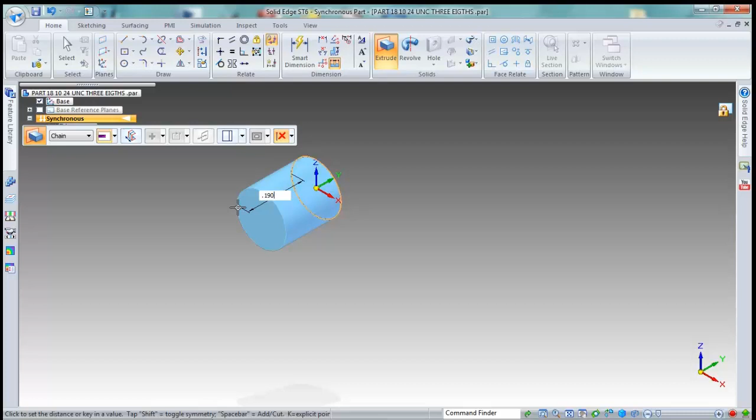We'll get the head taken care of first. We're going to extrude this in this direction, a distance of 3/4 of D. H equals D. So we're going to say 0.190 times 0.75. 0.143.

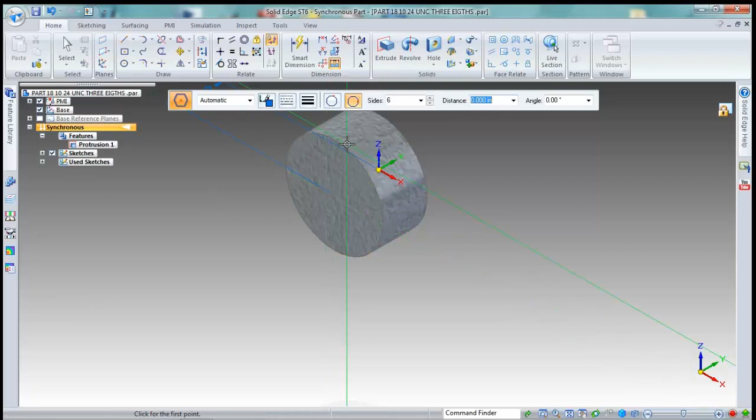This is a hex head piece, so we're going to draw a polygon by center, 6-sided, and from the flats it has a J dimension of 5/32. So we'll start in this plane, hit the edge, find the center point. Now, what is 5/32 divided by 2? Not sure, so we'll do 5/32... .078, and we'll just pop that right in there.

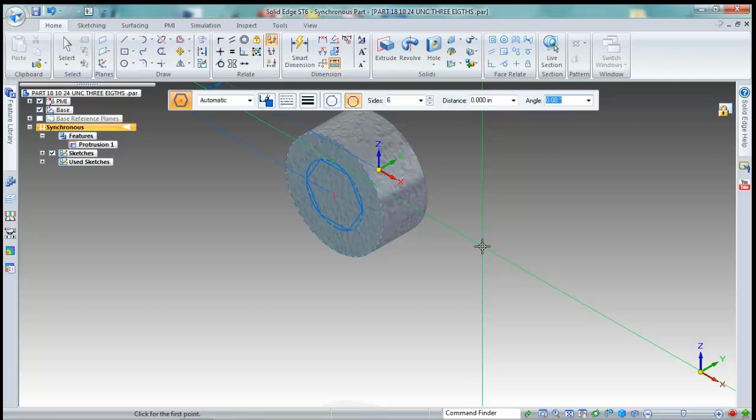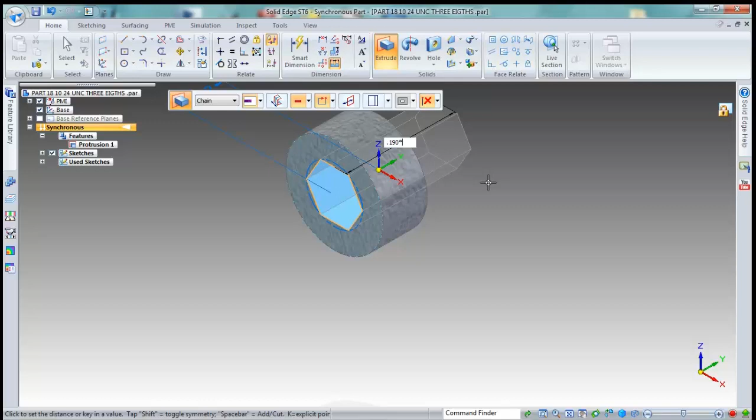Now the depth of this is 3/4 of dimension D, so it's the same as the H dimension, or 0.190. So I'm going to take my extrude tool again. I'm going to make sure it says remove. I'm going to grab this edge, hit enter. We're going to pull that in, and it's going to be 0.190 times 0.75. So there we have our head cap.

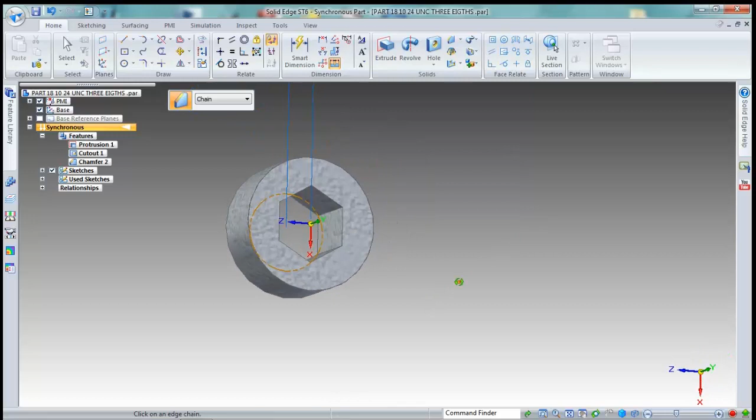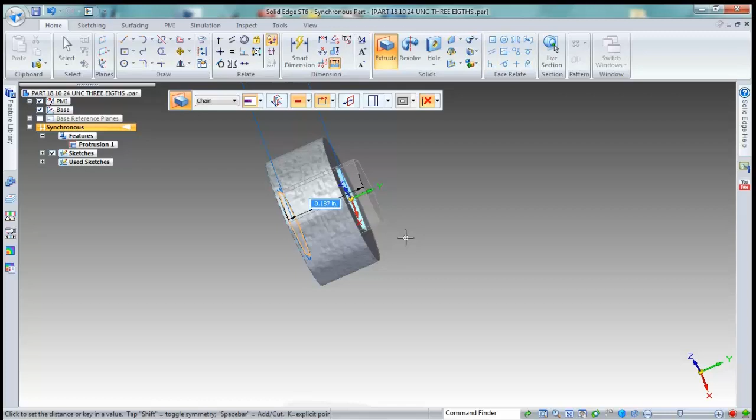Has a little bit of a chamfer on this edge, probably 0.015. Again, these are coming out of the box, so I'm not going to get too fancy with them. Ooh, why'd that go all the way through? That was not good. Did not want that to happen. All right. This should be 0.190, so I'm not sure why that got messed up, but we will see if we can fix that.

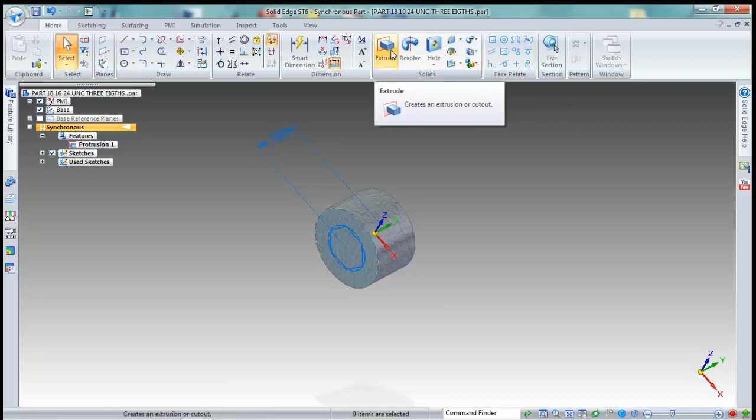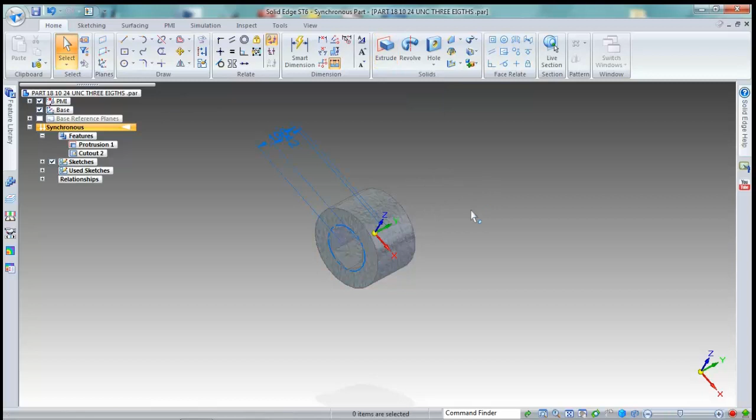Drop some live rules. There we go. Try it again. Extrude. I think I extruded that 3/4 instead of the socket head. So it's 0.190 times 0.75. Oh, come on. Oh. Gotta have remove. 0.190 times 0.75. That looks better. So it goes in 3/4, so you'll have an Allen wrench.

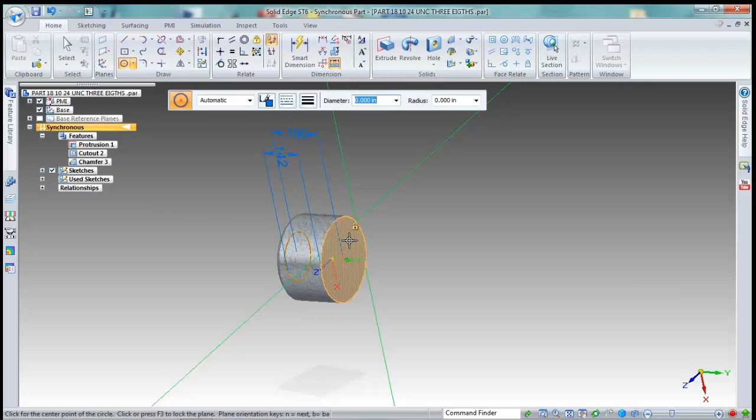Now we'll put that little chamfer on the edge. And we'll put our threads on this side. So it's an external thread. We're actually going to extrude from this edge. We'll put a point. Yeah, that's good right there. And we'll extrude that out. I didn't really pay much attention to the size because of the external threads, and this is going out 3/8 of an inch.

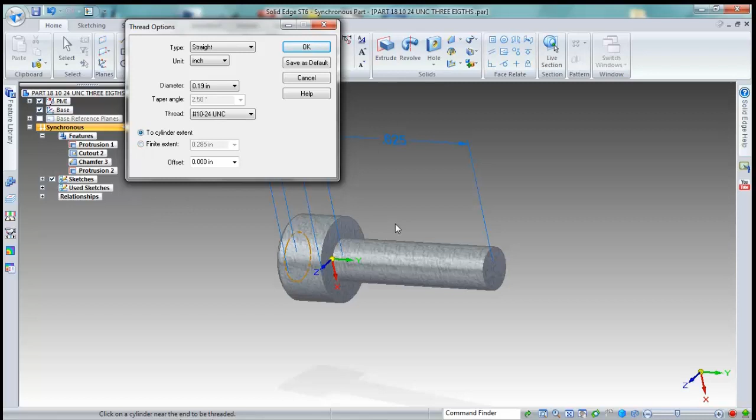Okay. And if we come up here, we have a thread option. I'm going to drop this down. This is a straight thread. The thread is a number 10-24 UNC. We're going to go to cylinder extent, meaning it's going to do the whole cylinder. And we're going to just left click, hit OK. We left click on this, and yes, we know it's going to change the diameter. So there's our threaded piece.

I'm going to go ahead and put a little chamfer on this edge. Give it a little start. And we'll do a file save. So that's our part 18. Now we'll just open up our part template again. And now we're going to do our 1/4-28 UNFs. We've got quite a few lengths, so we're just going to do one, and then we can make our different lengths from that one.

So I'm going to do a file, save as, and this one is going to be part number 10. And it's a, I'll say 25 for quarter, 28 UNF, 5/8. So we'll get our head size on here first. We'll make them all facing the same direction. Our head size on a 1/4 socket head is 0.375.

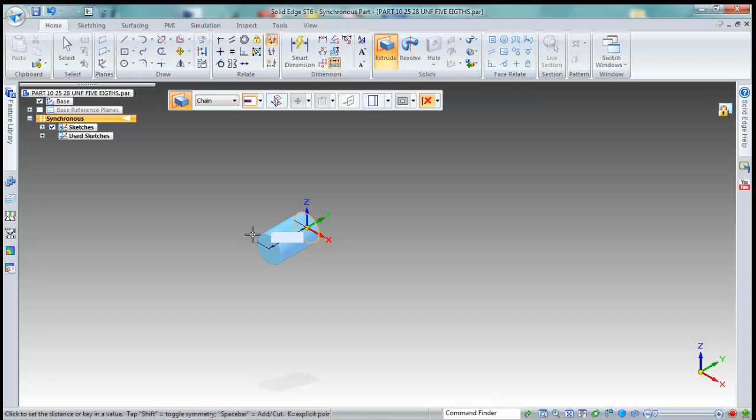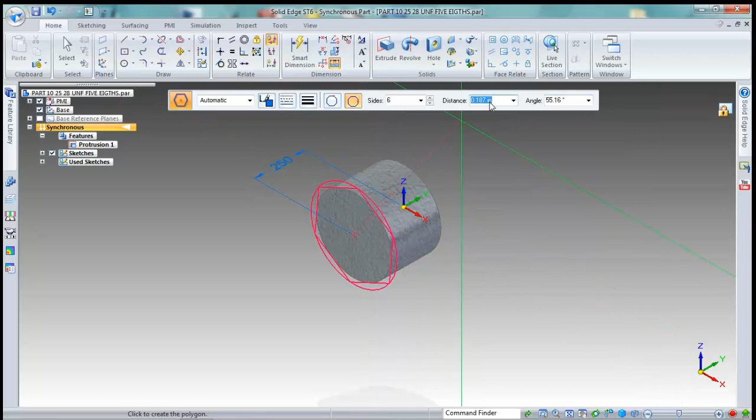That one we're going to extrude. Hopefully I can get this one right. The distance on this is 0.25. Now we'll go to our polygon by center. Just find this edge, move it down to the, I'll just lock that in. Go to the center. And the hex head on this one is dimension J, which is 3/16. So we're going to type in 3/16. Oops, divided by 2, sorry. There we go. On the fly.

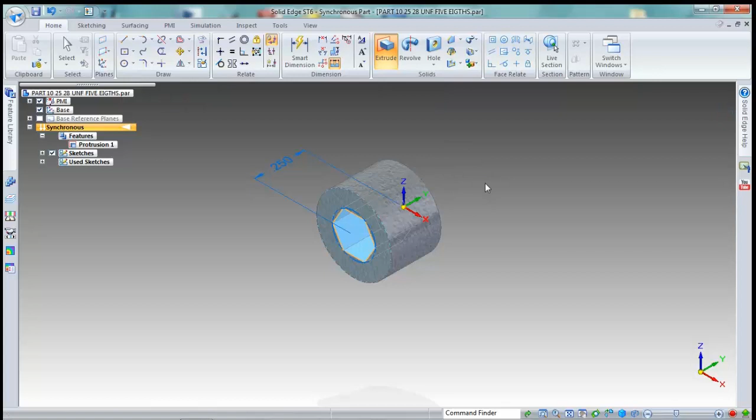And now we're going to extrude this using a minus. Use this chain, enter. We're going to pull that in a distance of 3/4 of D, which was a quarter. So we're going to type in 0.25 times 0.75. Yay, didn't go all the way through. We'll put our little chamfer on the edge of that. Again, not paying much attention to the actual details, because you're probably not going to make these, you're going to get them out of a box, but I want to have them ready.

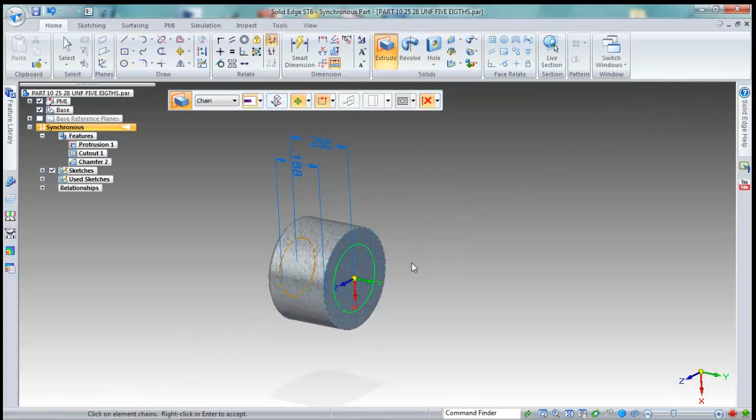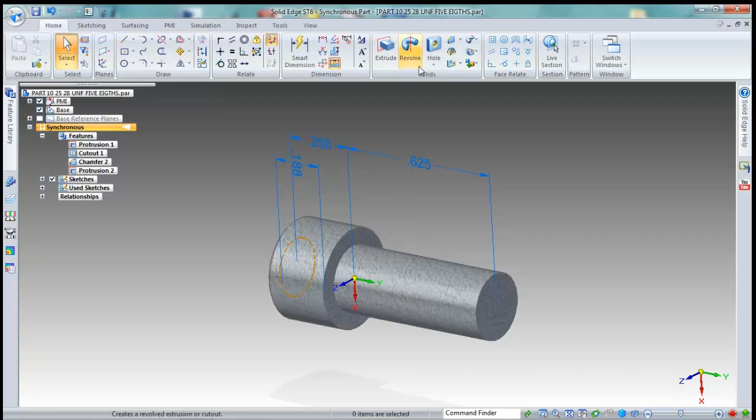So now we'll put our cylinder on the end. Again, we'll just do a 1/4 inch, a 0.25 diameter. We'll extrude that out. Again, this one is 5/8 of an inch, 5/8. And we'll put our threads on there. This is a 1/4-28 UNF. Put it the full length of the threads, no offset, just say OK. I didn't hit something right here, hold on. Thread to cylinder extent, sorry. 1/4-28 UNF, cylinder extent, OK. There we go. So there's our 5/8 thread.

So we'll do a file, save. We should also go in and check our, I'll have to do this on the other one, our file properties. I know this is steel, but our summary, this should be our, see if I can type this, 1/4-28 UNF 5/8 long. And this is project, we said this was going to be number 10. We'll say OK. Now we can do a file save.

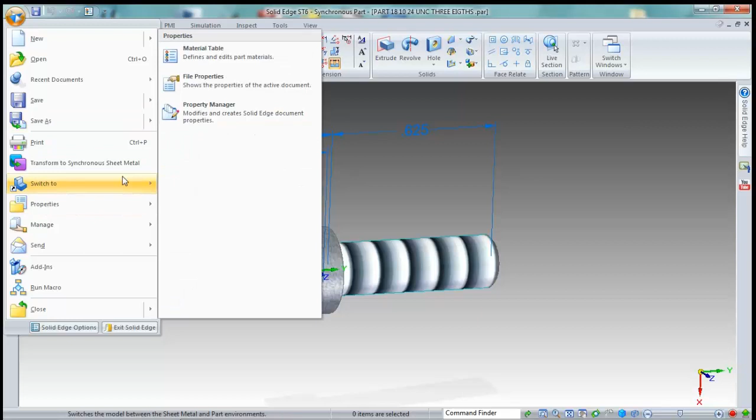We'll switch our windows to our part 18 and do the same thing. I just want to make sure we get this file properties correct. Come on. And this is a 10-28 UNC. And that is 5/8 long. And this was project number 18. Just say OK. And do a file save. We can do a file close on that one because we only have that one set screw.

Now, we did a file save on this one. Now let's do a file save as. And this time we're going to do a part 25. And this one is 1 1/4. Hit save. What we should be able to do is just select this arrow, and type in 1.25. It's going to lengthen it out. Do a file properties, and we'll go to our summary, and we'll just type in 1 1/4 inch. Hit OK.

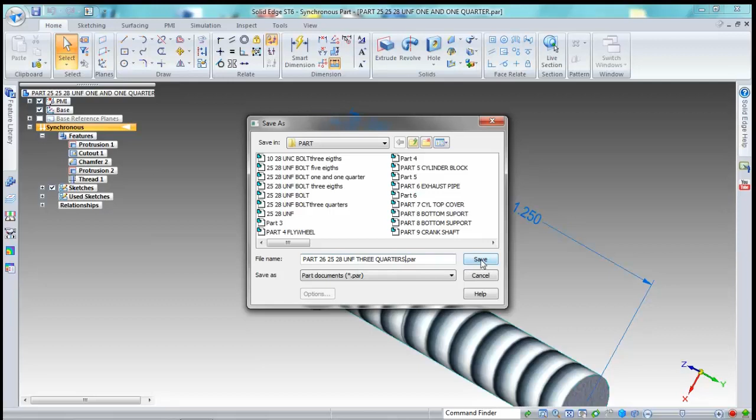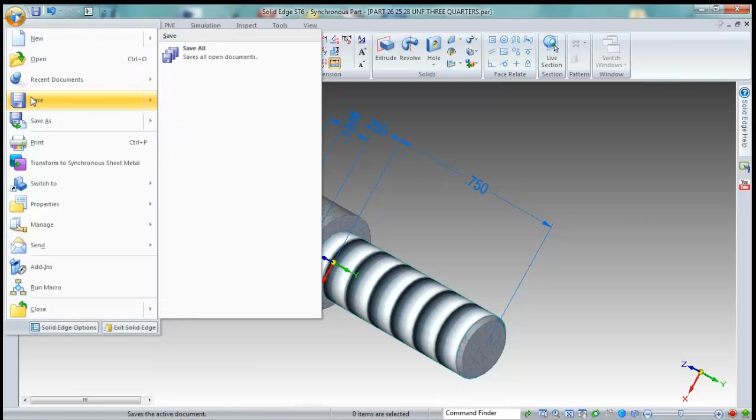I found some instances where we're going to need a 3/4 inch. We're actually going to call that one part 26. So we'll do a file save. Then we'll do a file save as, and this one will be part 26. And instead of 1 1/4, this one will be 3/4. And we'll change the length of this to 0.75. Once you have it set up, it's really easy, so I should have a little, whoops, chamfer on the end of that. And we'll do a file. Oops, I gotta do my file properties first. And this one was, just type in 3/4, that should do it. Now we can do a file save.

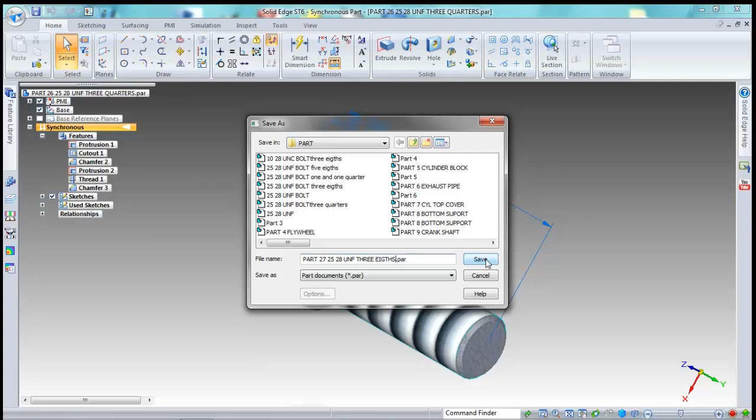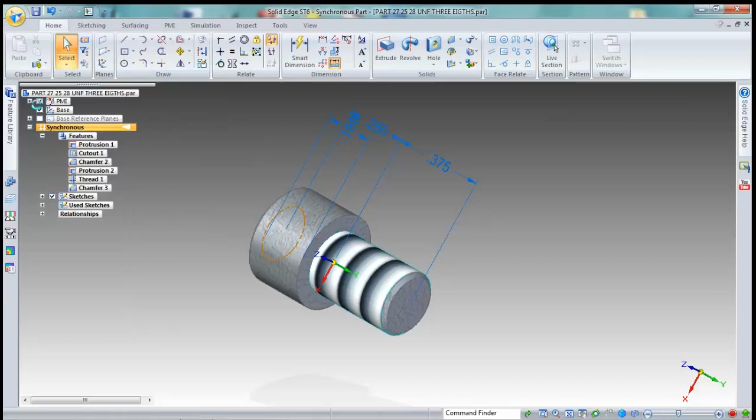And one more that I think we can use, we'll call this one 27, is a 3/8 long screw. This is just for the valve cam, we want a short screw to put in there, so I'm going to hit save at 3/8. Just going to click this, type in 0.375, that little stubby screw, and we'll do a file properties, summary, just change this to an 8, hit OK, do a file save. I think I want to open up my 5/8. Part 25. Yeah, it was this one. Didn't put a chamfer on the end of that.

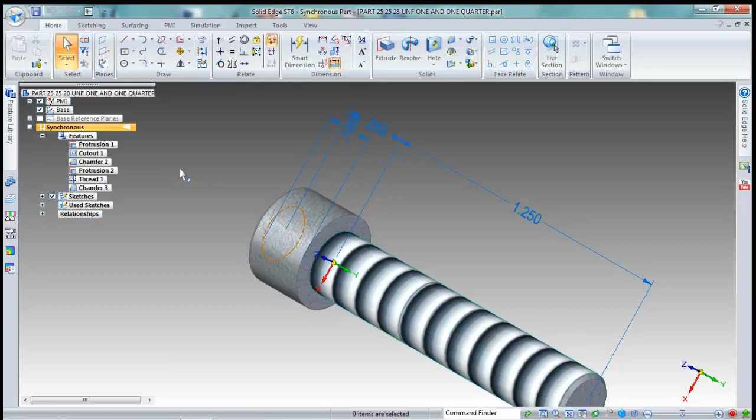So now we have a 1/4-28 UNF at 1.25, 0.75, 5/8, and 0.375, and we also have that number 10 set screw, the smaller one, at 5/8 of an inch, or 3/8 of an inch. And I think that should do us. We can always go back and change some of those if we need to later on. As a matter of fact, well, I don't really know if we need it.

Let's open up that set screw again. What was that, part 18? That was 5/8. Let's just do a file, save as, and I want to save this as part 28. And this will be 5/8, just in case we need a longer one. Hit save, and I'll just, oh, that is 5/8. I'll just save that one.

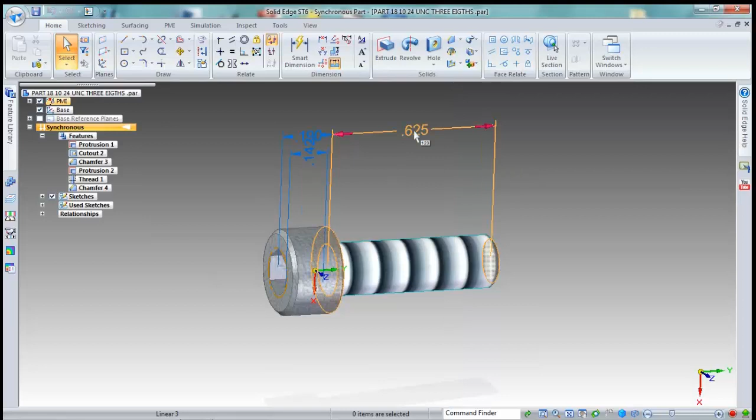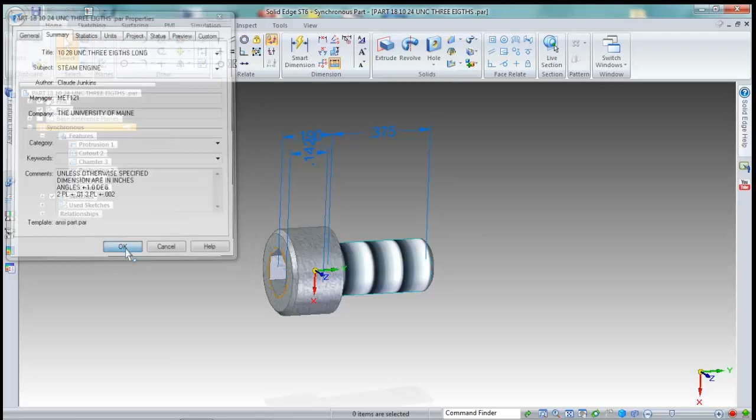Let me open up that 18 again. Yeah, I must have screwed up this one. This should actually be 3/8 of an inch. So it's 0.375. Now we got a little stubby one. File, save. Make sure I got my summary right on that one. Yeah, should be 3. Yep. So we should be able to find them anytime we need to. So now we've actually got like 6 different screw sizes that we can use as part of our assembly in our model, and that should take care of our fasteners, I believe.